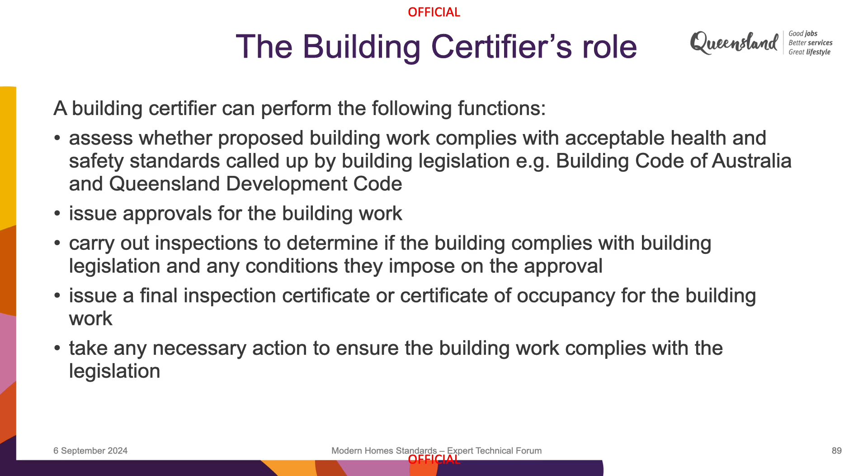So when we come back to our role in the actual construction phase, the Act requires us to inspect detached Class 1A dwellings at certain mandatory times. The first one is at the excavation stage or prior to the slab being poured. For that first inspection stage, the Act requires that only a building certifier can sign that stage. Now, 99.9% of builders that we work with use engineers to look at the structural aspects of those foundations. But the engineer cannot sign off the stage. A certifier must sign off that stage.

And what a lot of engineers forget is that when they're doing those inspections, they are acting for the building certifier. They're giving us inspection help, which is defined in the regulations. They are a competent person acting for us. And a lot of engineers forget that.

The next stage is the framing. Now, there's a little bit of a crossover here between what's in the Act and what's in our guidelines. The Act says where the bracing for a frame consists of cladding or lining, the inspection is after the cladding or lining is fixed. Now, that's a bit of an issue, because the inspection guidelines also ask us to look at tie down, member sizes, all these other things. So if we get to a frame and it's lined, we can't see anything.

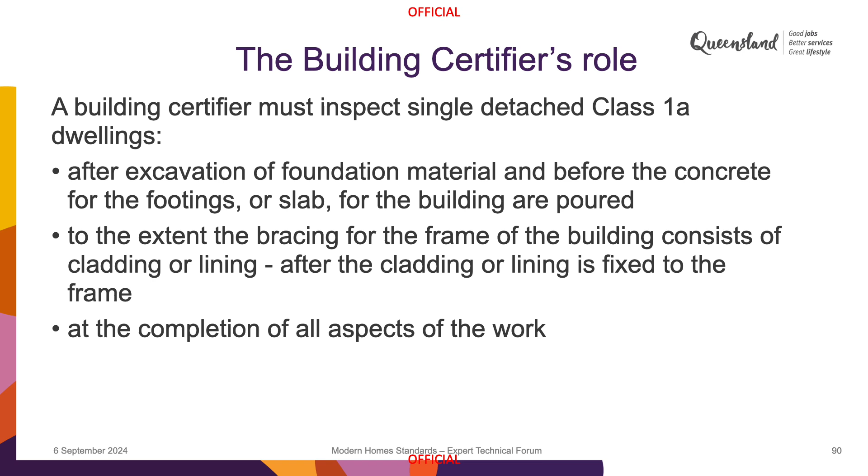So let's look at design stage, approval stage. Before we give an approval to build, what we're going to need. We're going to need designers to be putting more information on plans. The plan quality in Queensland, I have to say, is abominable.

I look at what we have to require in New South Wales, particularly now on Class 2 buildings, and some of the other jurisdictions that I work in, and internationally, the quality of plans that are required. I do a lot of work in the US and in New Zealand, and the plan quality there is such that ours just don't even come a patch on it.

We're going to need to see more information on plans. So when we look at the step-free access, if you're going to apply for the concession, you can't just say, oh, well, it's greater than 1 in 14. That's not going to work. We're going to need the proof that that gradient exceeds 1 in 14, or you can't get the gradients for your ramps, your 9 metres for 1 in 14, your 15 metres for 1 in 20. We're going to need to see that to say that you can't do it.

If you don't apply for the concession, we're still going to need that information anyway, because if you're using the pathway, we're going to need to see that path, the details, the locations, the widths, the gradients, because we're going to be using that document at the end to make sure you've met those gradients.

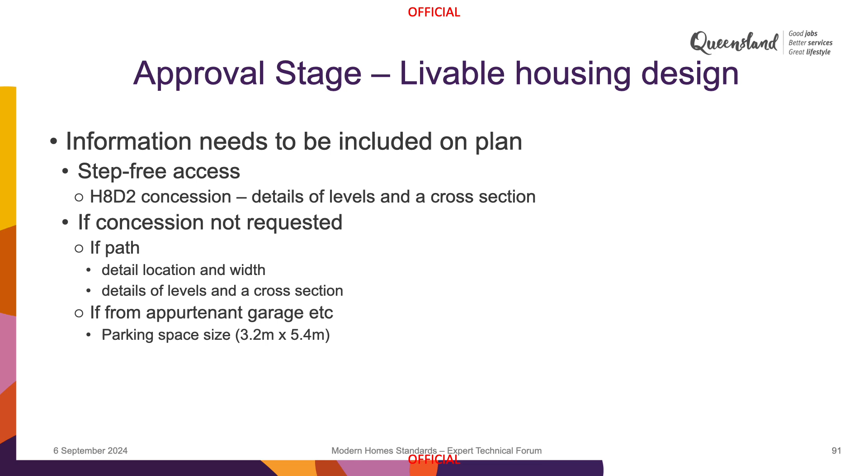Also, we start looking at the thresholds. Now, Debbie explained some of the issues she had trying to get into that building she designed. We're going to need to see those details, and particularly if it's the entrance, the method of weatherproofing. There's other provisions in the NCC that cover all this stuff that complement these that we have to look at.

Door schedules. We're going to need to see your door schedule to make sure you've specified the correct doors. We're going to need to see those corridor widths. And as John mentioned, remember, finished surfaces. Plans today from designers dimension to the structural framing. If we see a 1 metre hallway on a plan, we're going to say your hallway is not wide enough. You must consider those structural finishes.

The wall reinforcement, we need to know how you propose to do it. There's several options in providing that wall reinforcement. We're going to need to see what method you're going to use and what bathroom it's going to be in. The sanitary compartments, we're going to need to make sure that you've got the circulation spaces that are required in those compartments. For showers, we're going to need to see what entry detail you've decided to pick, because again, there are a number of options.

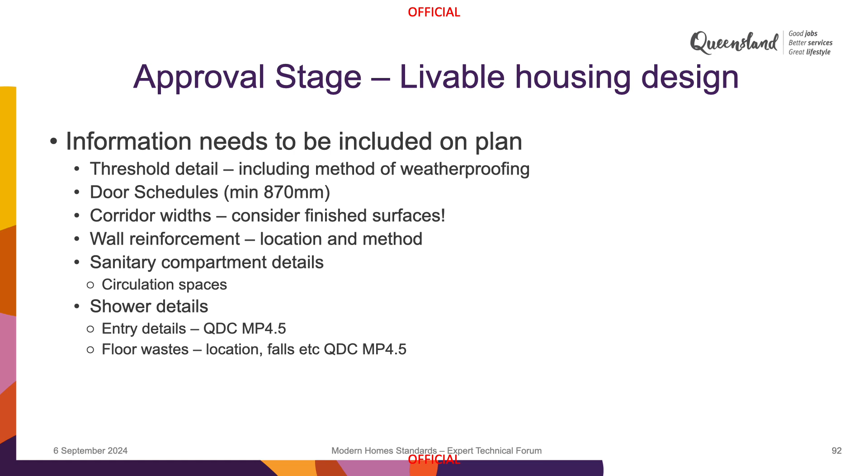So now you've actually got your building approval. What happens through construction? So the first time we're probably back on the site is at frame stage. Remember, as a building certifier, we're not a clerk of works, we're not a supervisor. We don't come to the site every day. There are mandatory stages we have to come.

I'd love to have more inspections. I make good money out of inspections. Builders don't seem to like to pay the extra bills for other inspections though. The legislation allows us to specify additional inspections if we want. The legislation also allows the owner to request additional inspections from the certifier. A lot of people aren't aware of that.

So this might be the first time we're back on site. We're going to look at probably the step-free access, maybe ask the questions, have you considered it? If the building's lined, we're going to be asking a few questions. Right? And what we're seeing a lot on framing is, we're not doing the wall reinforcing till next week, we've got the guys coming back to do that. We're going to need to see that or get evidence of that wall reinforcing.

Door widths and passage widths. Have linings been allowed for? Bathroom sizes. But are these a certifier's responsibility at this stage of the build? We don't know what wall linings you're going to put in there. We're there looking at aspects in our inspection guidelines. The inspection guidelines specify what we need to look at. At this stage, this is back on the builder, this workmanship.

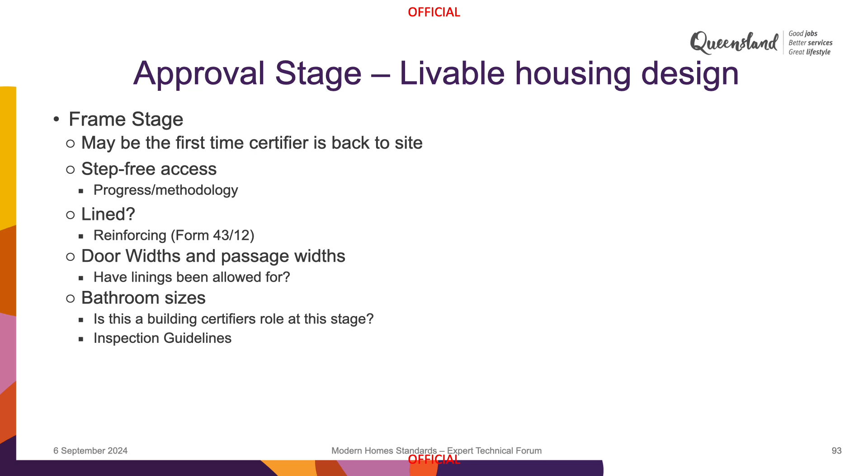However, if you don't get it right here, it's going to be a problem when we get to the final. So here we are, we're coming to do the final inspection. Your access way, if the access way is part of the proposal, we're going to check the gradients. All my certifiers carry a digital level.

We have in the past only used these for accessible facilities in class 2 to 9 buildings, but I've now issued these to all my residential inspectors because they're going to need them for the LHA. Step-free access, if it's ramp, the gradients, dimensions, the parking space size, is it clear? John mentioned, does it have a dirty great hot water system sitting in it now?

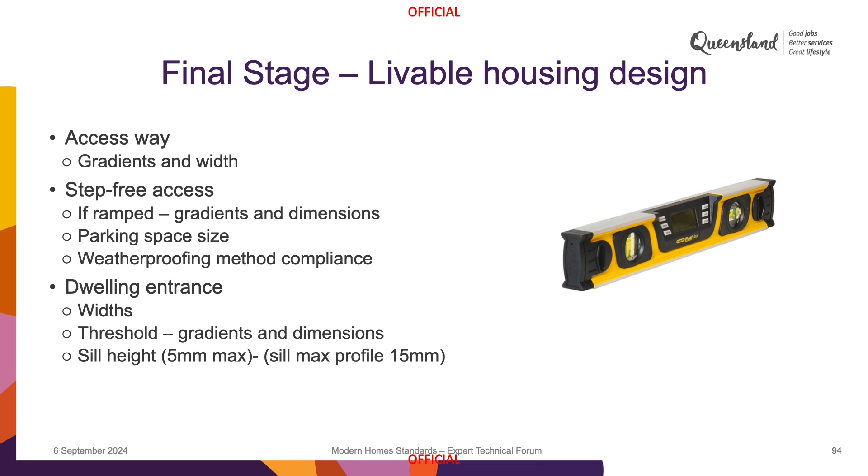Weatherproofing, a big one for us. Outside the LHA stuff, but it's still a big problem for us, weatherproofing. How have we addressed that step-free entry? So we get to the entrance, the widths, the thresholds, the gradients and dimensions, the sill height, the 5 mil max. Max, 5 mil, not 6. 5 mil maximum. John said several times, the tolerance is 0. We do not have tolerances.

Internal. All my inspectors carry a digital measuring tape. You can't trust a metal tape. We use digital. Passage width, door clearance. We're going to put a digital measure on your passage width. If it's not 1 metre, it will not comply. Not 998, 1 metre.

Sanitary compartments, dimensions, clearances. John mentioned a very good point about toilet roll holders and things like that. We will take a pragmatic approach to those elements because it's very similar to what we have in AS 1428. The showers, if we're using the step down, 5 mil max. That's it, it's maximum.

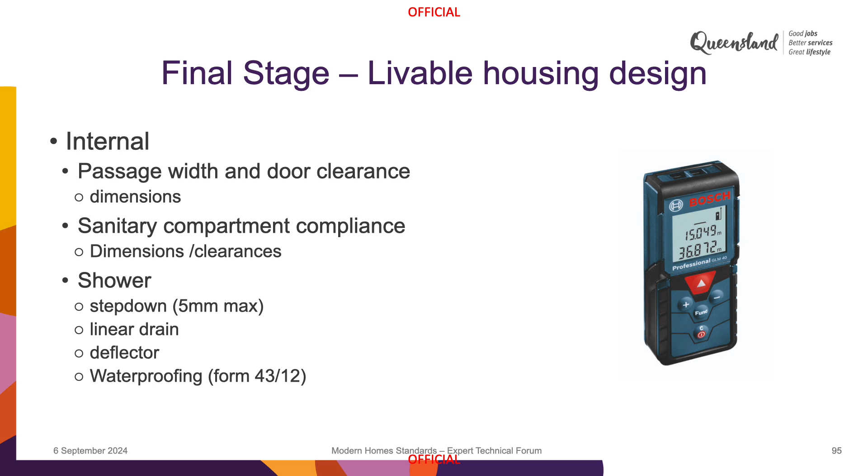If it's a linear drain, whether they have the deflectors as shown in the LHA or the livable housing stuff, the waterproofing, how's that been done? Because the waterproofing requirements have other elements that you have to include with water stops and the like. Floor wastes. Are your falls between 1 in 100 and 1 in 80? That's 1% and 1.25%, not 1.26. We have no tolerances. Well, you do have a tolerance, between 1 in 80 and 1 in 100. We do have a tolerance there.

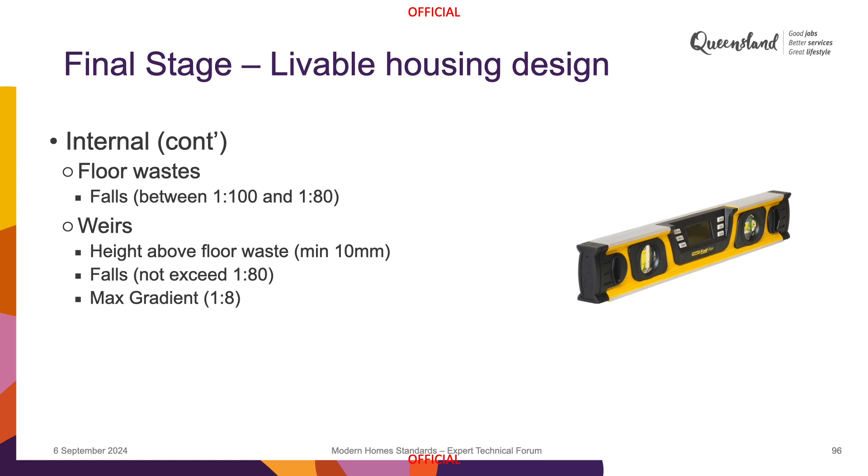If you're using the weir, the floor height above the waste is minimum 10 millimetres, not 8. I don't want to be standing in court when there has been an overflow into the hallway for an insurance claim. I can't say to the judge, well, it was only 8, surely that's not a problem. I'm still going to wear it because it's not 10. I'll have the builder very closely beside me trying to justify that as well. So again, falls not to exceed 1 in 80, maximum gradients of 1 in 8. So that's on the livable housing side.

Yep. Getting there. Okay. So 2 minutes. That's all I got, 2 slides.

So just back on the energy efficiency we looked at this morning, really the changes for us on the fabric side are no different to what a certifier is looking for now. Are your colours correct? We need evidence of that insulation. We need evidence of window compliance, lighting compliance, fan compliance. Did you specify 900 mil fans or 1200 mil fans and we've got 900 mil fans? Those are the sorts of things we're going to look at.

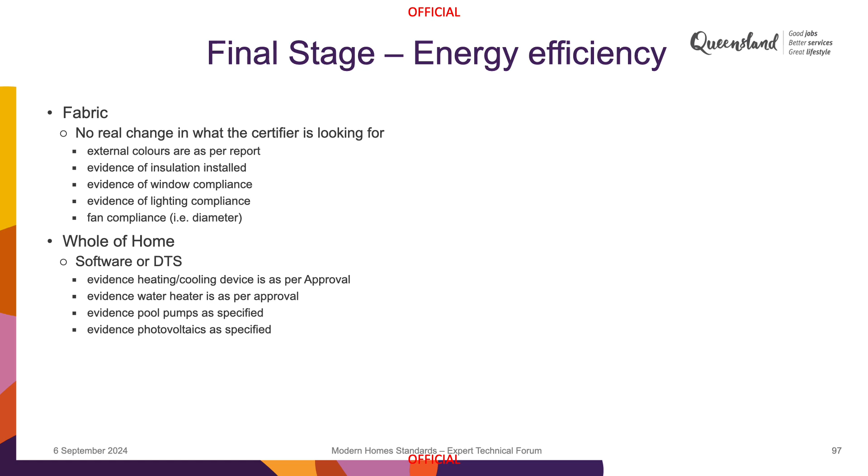Whole of home creates another interesting one because now we're going to have to look at other elements. The evidence of heating and cooling, evidence the water heater is as per the approval, evidence the pool pumps are as specified, evidence the photovoltaics are as specified. The software inputs into the reports now look at appliances: gas, electric, induction. Now, we're not going to check to see if it's a Miele versus a Westinghouse, but we will need to know whether it's changed from electric to induction or to gas.

The other problem we have here is, in a lot of cases, the appliances are not in the building when we do the final because they have a nasty habit of disappearing. And the builders like to put them in just before they hand over. So generally what we'll see will be a cable hanging out the wall and a cutout in a bench. So, as I said, we're going to need more information on the plans, and we're going to be checking those details on site. And currently, there are no tolerances. That's what we have to work with.